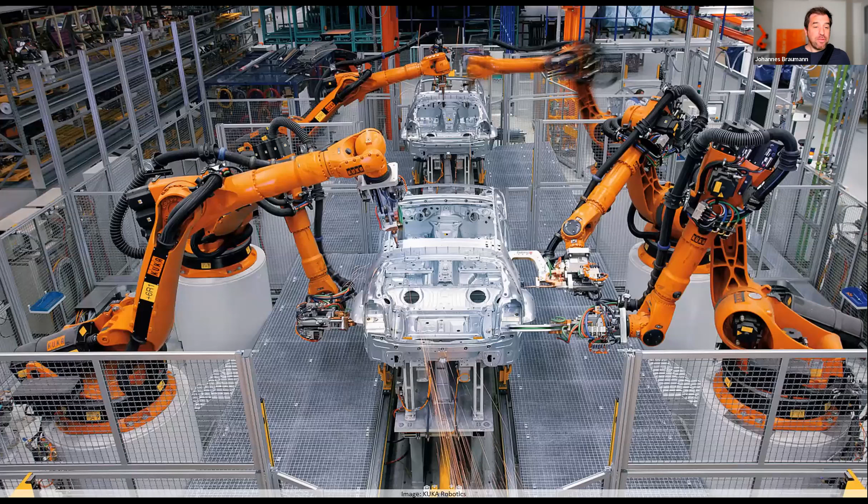First, it's important to look a bit at the terms. The title of my talk refers to large-scale robotics. We could have also called it industrial robotics, because these are the machines, the robotic arms, that we primarily work with. We chose large scale because the scope of our work isn't really limited to typical industrial processes.

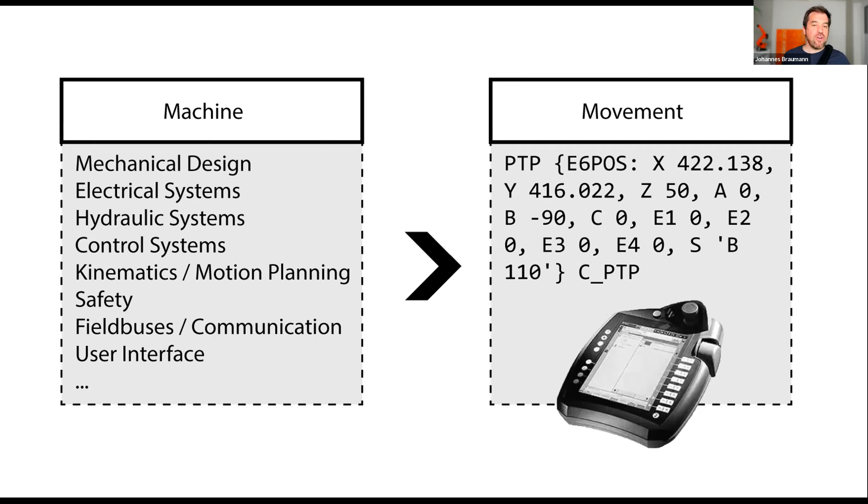We like using those robotic arms because they are such a stable motion platform. They greatly reduce the complexities of building a custom machine, and it still comes down to programming just the movement. Just movement is still a tricky term, because there are quite a few complexities in it, but of course this is much easier than having to build something with mechanical, electrical, maybe hydraulic systems, communication systems, and so on.

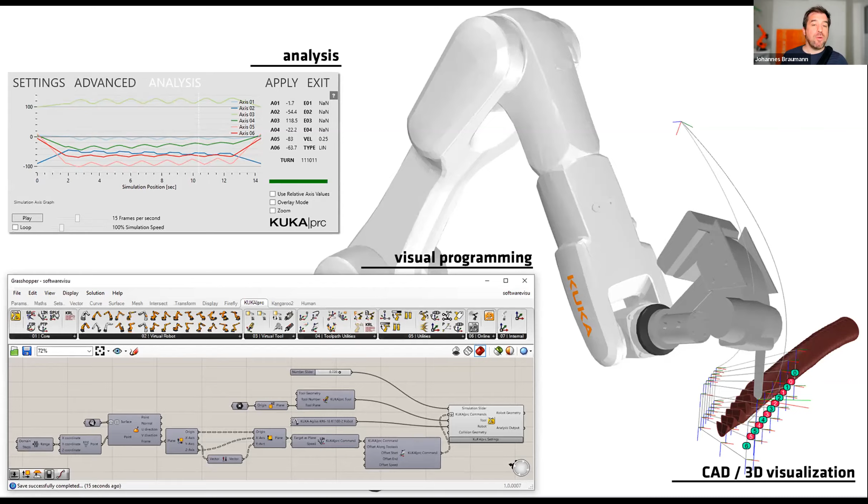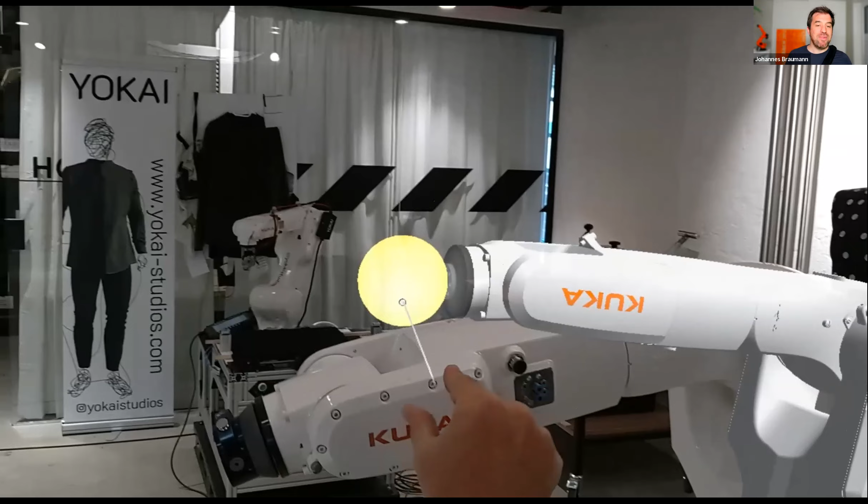But an interface can also be an everyday item, like for example here a mobile phone controlling these puppetry robots in real time. And within the scope of this research, of course, also an augmented reality headset like Microsoft HoloLens.

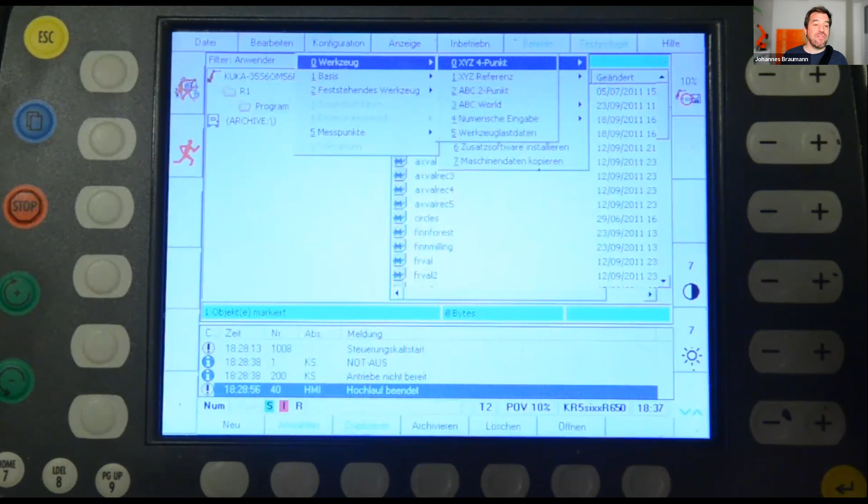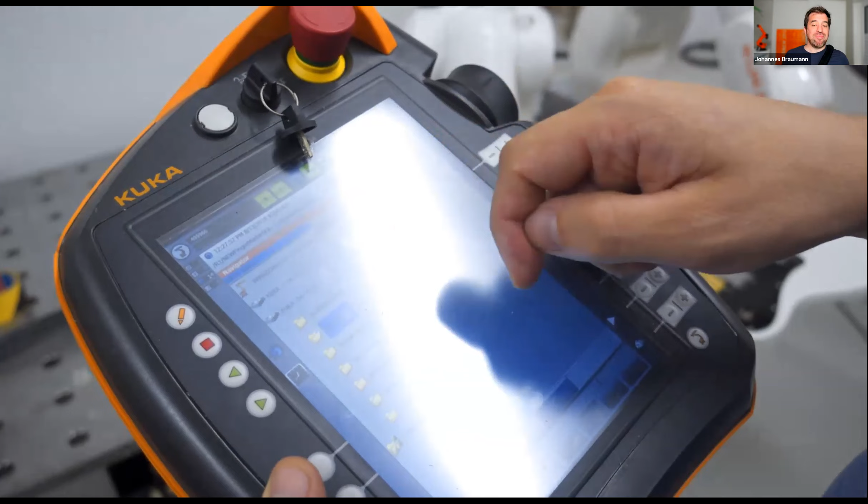You don't program in an IDE, but directly on the controller, the so-called teach pendant. Maybe that video is a bit drastic - this is how it looks for a current generation robot with a touchscreen interface. But the concept is identical: you move the robot somewhere, save the position, and repeat the process until the program is complete.

The nice thing about this is that because you program on the object, you don't have to worry about matching digital and physical data, since you're working in one single environment.

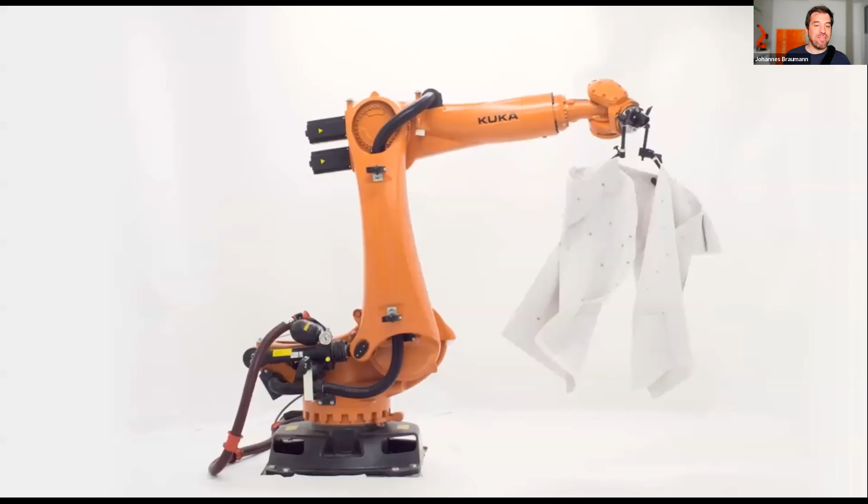That works well for processes like welding, one of the very original robot applications, but of course also for dusting off your McLaren if you want to - something we did for a pop-up store in Zurich at some point. But it's less useful when you do something with thousands of positions.

What you're seeing now doesn't look like thousands of positions, but actually this is a stop motion sequence where the robot controls two cameras, moves a small increment, takes a photo, and then repeats that. This was done to create an 8K 3D animation for the deep space environment at the Ars Electronica.

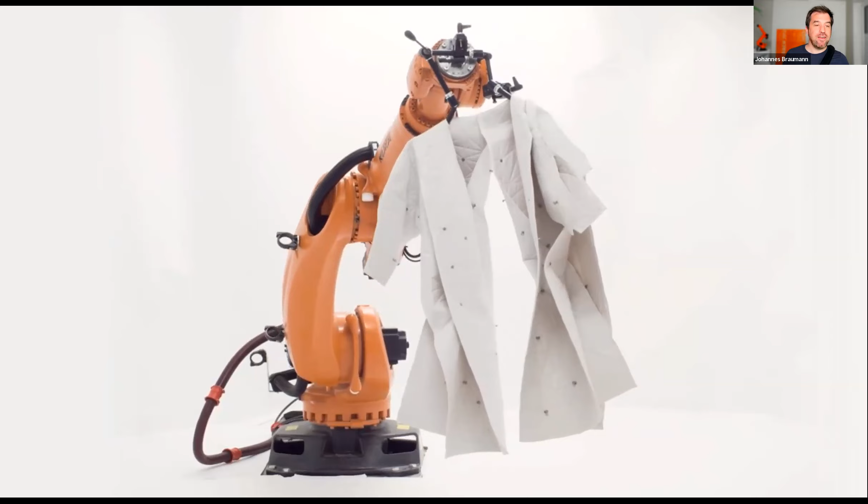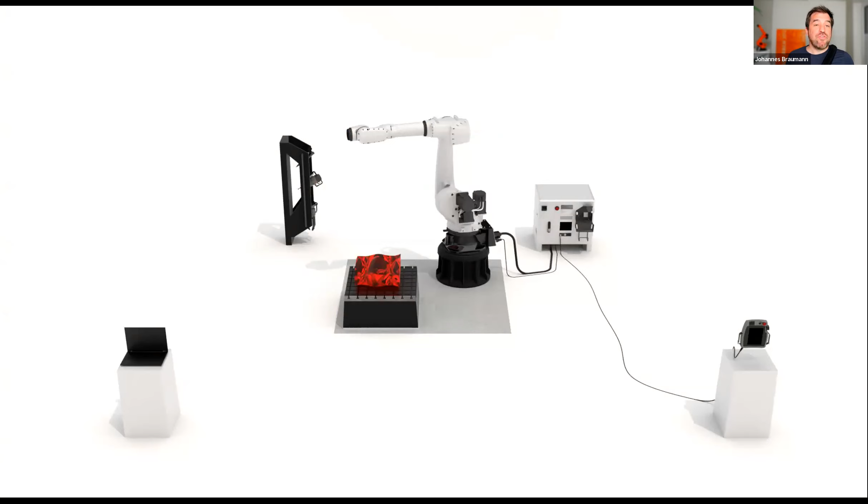You need to imagine a 16 by 9 meter robot reaching into the audience now, which of course we can't repeat over Zoom. That also shows nicely how an industrial robot is never just the arm, but is always part of a larger system with the controller, the tool, the teach pendant, and so on.

Obviously real-time control is important for the interactive processes we want to achieve through augmented reality, but implementing that can be trickier than expected. One of the reasons for that is motion blending.

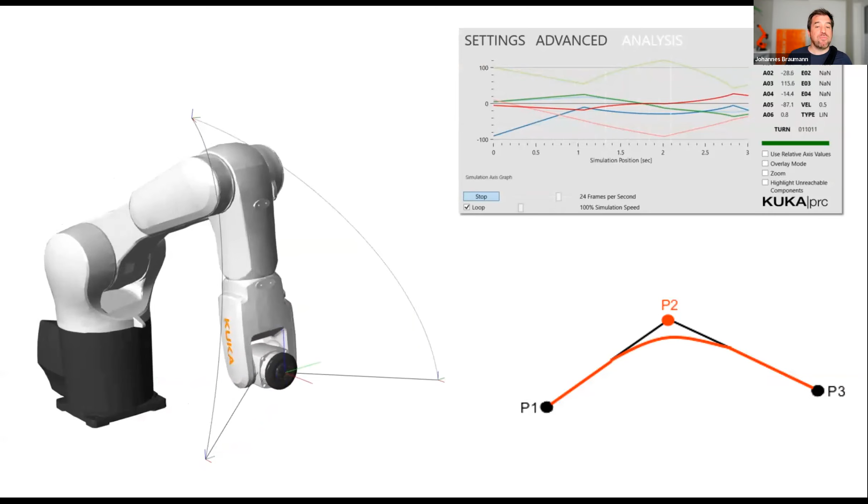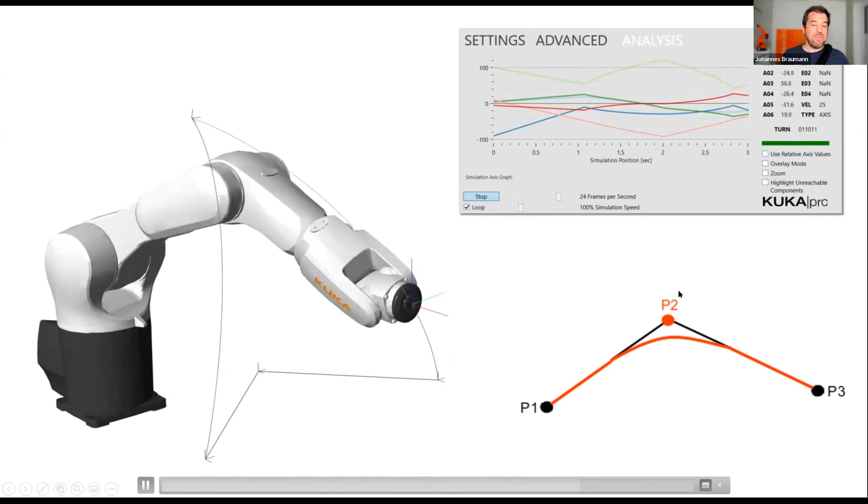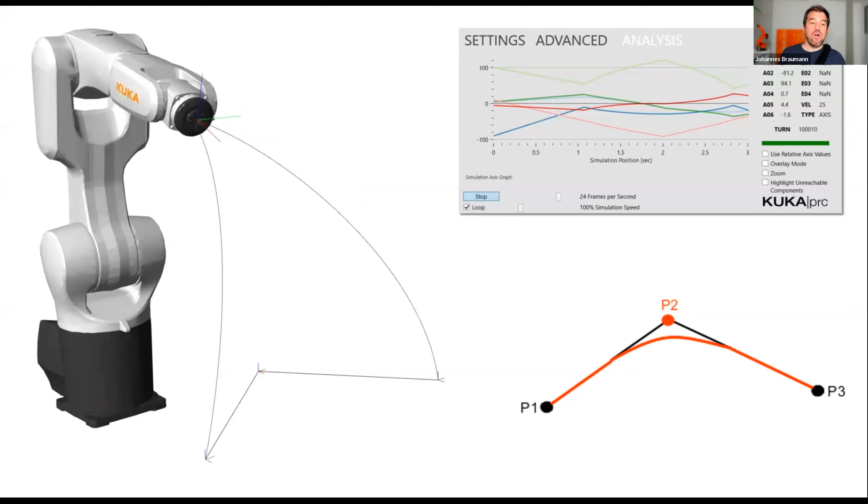If you look at the simulation, the robot moves through that sharp, nearly 90-degree corner at a constant speed. It doesn't slow down. In the real world, that would necessitate basically infinite acceleration to achieve. So what the physical robot can do is either stop at a sharp corner, or if it knows the next position, it can try to blend the movement slightly. That increases the response time of a real-time system, because the robot always has to have the following positions buffered in order to achieve a smooth movement.

Another challenge happens when we want to control the time. With the robot, we can only control the speed and the target position, but we cannot by default set the time when the robot should be at a given position. You might say, well, if you know the speed and where it's going, you can calculate the time. That would be nice, but unfortunately those acceleration and braking curves of the robot are not known, so you can't really easily predict that just by dividing.

A system that can do that is the so-called real-time sensor interface, RSI. That was initially made for sending the robot tiny offset positions every 4 milliseconds, for example, to achieve a constant pressure for a polishing process. You have a force torque sensor that gets a certain value, and then the tool moves a little bit in order to keep that constant.

Of course, instead of making tiny movements, you can also do large movements. With that system, you can basically create time-accurate processes, because for every 4 milliseconds, you define where the robot should be. And that data could be coming from motion capture, for example.

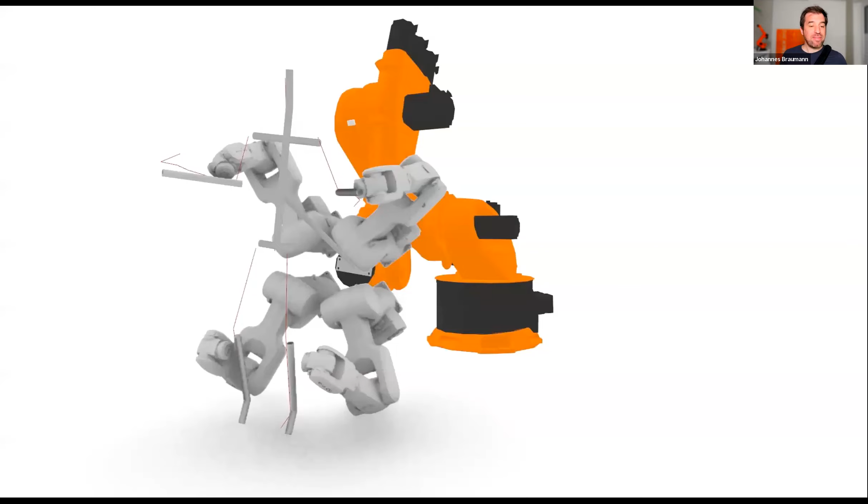Here, together with the Future Lab, we captured the movement of the dancer Silke Grabinger. Then in Grasshopper, we interpolated it to 250 Hertz and mapped it to a 5-robot system that duplicated the movement with the exact timing. We have one big robot doing the large movements, and then 4 small robots, each responsible for a single joint.

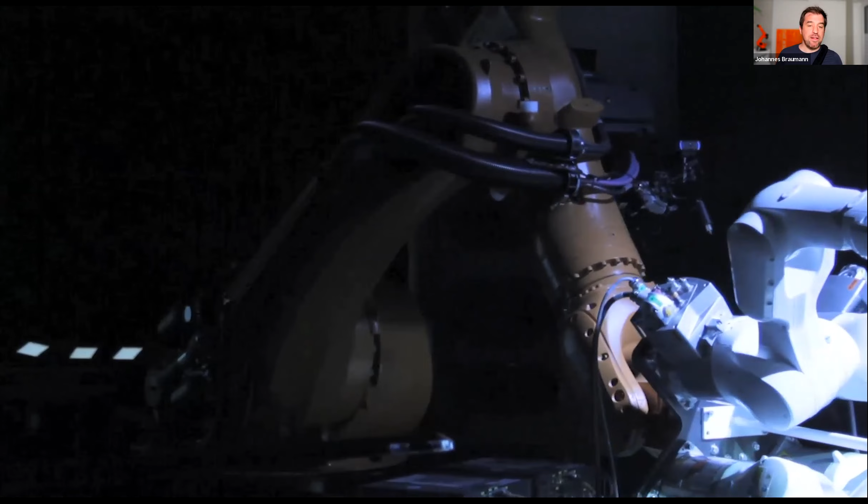Of course, our Windows PC was not able to stream the data deterministically, so we used an industrial PLC to send the data over an Ethercat field bus to the 5 robots, so that this would really work in a very reliable and safe fashion. You see the performer and the robots are quite close to each other, which is of course tricky for everything that is basically real time.

The third option is that you can always fake it by reversing the constraints. For example, here we don't influence the movement, but instead just send the vector of a toolpath to an external live visualization system, in that case based on VVVV, because we have the option to send any kind of arbitrary data between our control system, our laptop, and the robot. So here the complexity of the robot movement is omitted, because the robot just sends where it is to the visualization system, which is then much easier to control than the physical aspect of the robot moving around.

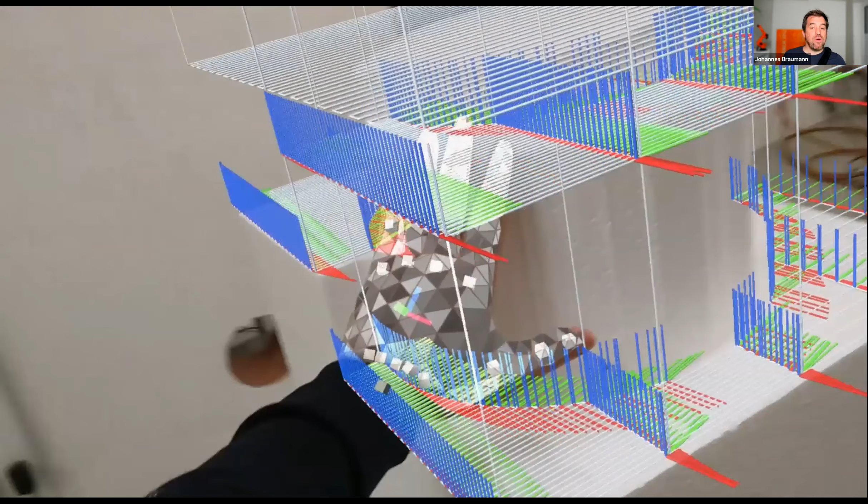So to come back to augmented reality, for us, we currently see the largest potential in the areas of supervision and interaction. Where is the value in seeing where the robot will move, superimposed over the actual object?

A part of every robot process is the matching of the virtual and physical environment, because only then can a simulation be accurate. At the very least, the robot has to know where the origin of the 3D or CAD system is located in its physical workspace. And while the robot itself doesn't care about the geometry of an attached tool, whether it's a sander, a drilling tool, a paintbrush, or something entirely different, it has to know a reference point on the tool.

And currently, that creates a large potential for errors, because we usually do this by hand. For example, we move the robot to 3 positions on an object to define the position of the coordinate system, or we approach a given point from 4 different directions to calculate where this reference point is in relation to the flange of the robot. So we think AR can really help make sure that the virtual and physical spaces correctly overlap.

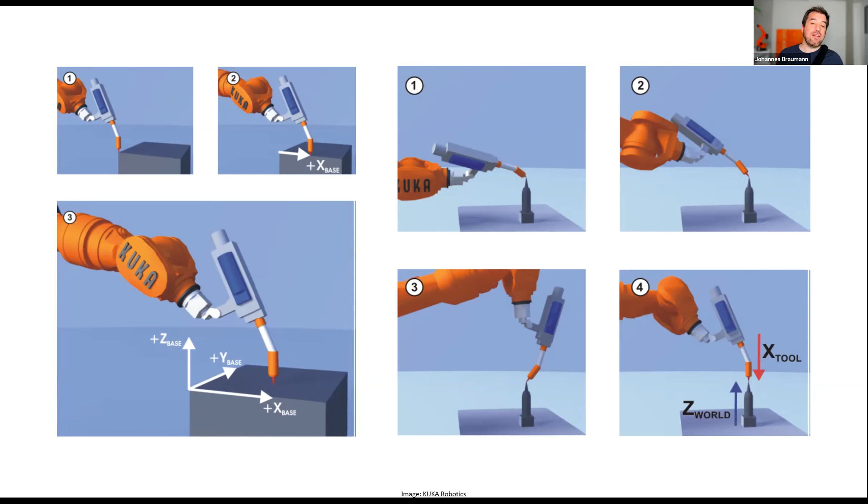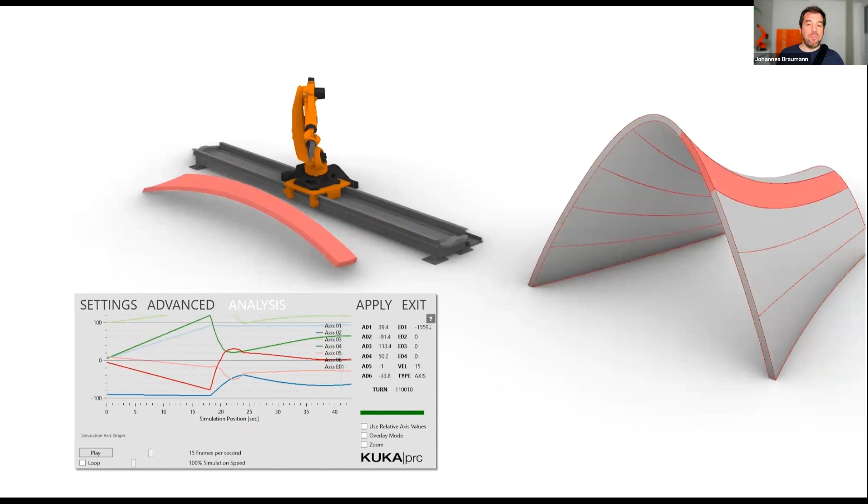That brings us to interaction. My default tool to use is Grasshopper, a very geometry-focused visual programming environment where your code forms an acyclic directed graph. This is best for production processes and mass customization, where you go from design to fabrication. You can repeat that process a few times, but fundamentally it's not cyclical, so this is less ideal for interactive processes.

Also, Rhino and Grasshopper's systems don't basically run on headsets, Windows-based ARM devices, or whatever. Unity, on the other hand, works very well with augmented reality headsets. We also like the capabilities of visual scripting to allow us to visually define state machines for user interaction in a very accessible way. However, the geometry library is much more limited if you want to do complex toolpath calculations, and a headset's performance would be too low to do these complex calculations.

For us, an enabling factor now is Rhino Compute. This is a system provided by the developers of Rhino that can run complex Grasshopper calculations easily on an external server. So we first set up a server that runs Rhino Compute to offload the complex calculations from the headset, with a nice and easy to use REST interface.

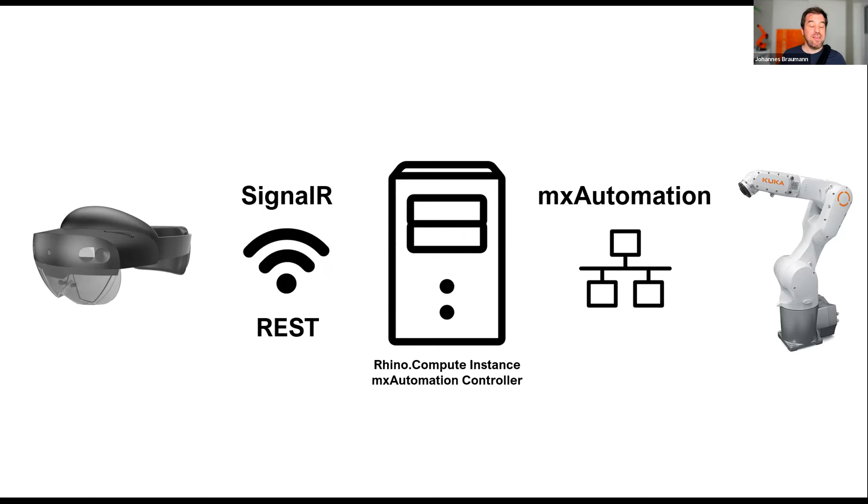But then during testing, we realized that the headset's Wi-Fi communication was also too unreliable for an industrial machine, leading to timeout errors. So we were already using a hard real-time interface. To solve that, we created a custom interface that basically uses very soft real-time calculation via the web technology SignalR with the headsets, and then on the other side communicates with the robot through a stable Ethernet interface.

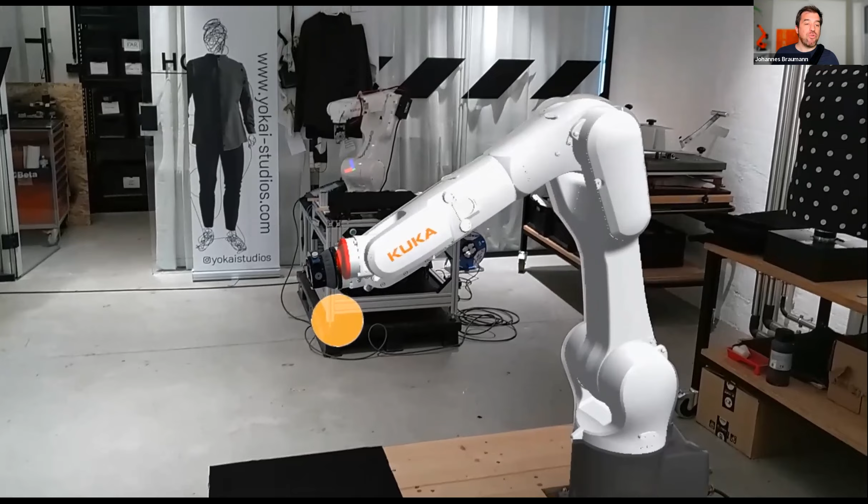So here's a quick try of that in augmented reality, where we virtually programmed positions and then had the physical robot repeat them, just like the teaching by demonstration that I mentioned before, but in this case done in a combined kind of digital and physical environment.

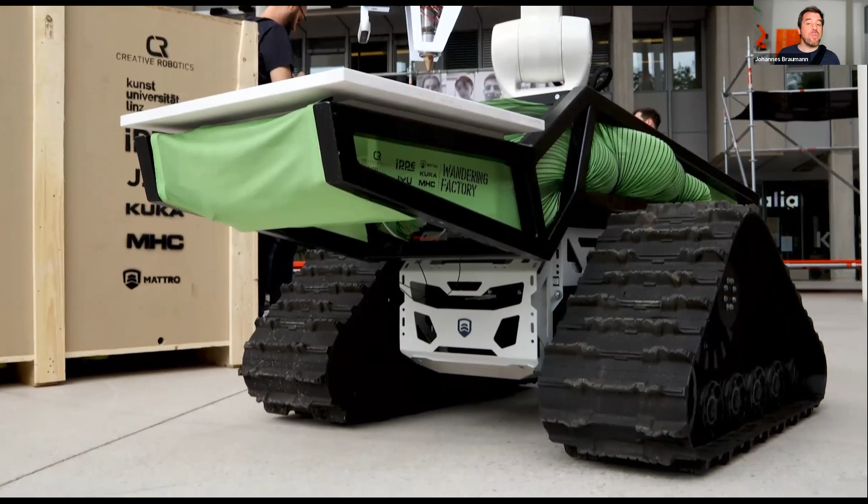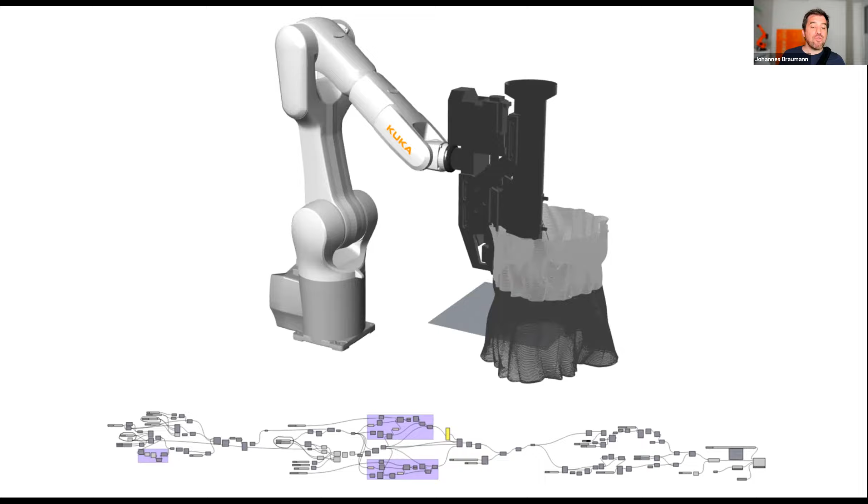We used that software architecture also for another project where augmented reality was only used for visualization. This is the Wandering Factory, a mobile robotic fabrication platform. Here you can see in Unity how the platform perceives its environment with a 3D camera and then prints individualized objects that fit exactly onto the scene. The individualized path planning is again done in Grasshopper, but is then exposed to the user through our Unity visual scripting based software architecture.

So we're still at the beginning of this journey, as I mentioned before, but we really see a large potential in augmented reality for large-scale robotics. And honestly, we're having a lot of fun just playing around with these exciting technologies. So thank you very much on behalf of the entire team. I'm happy to answer any questions you might have. And I'm also already looking forward to the other presentations to see what is happening in the world of augmented reality. So thank you very much.

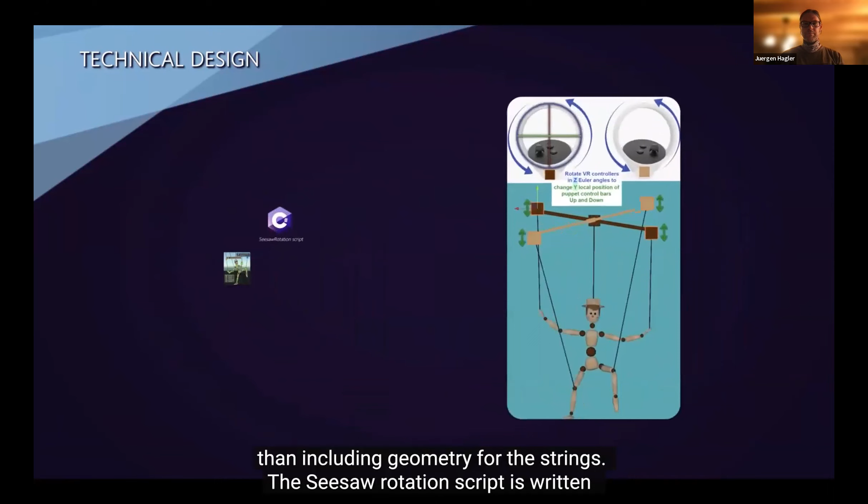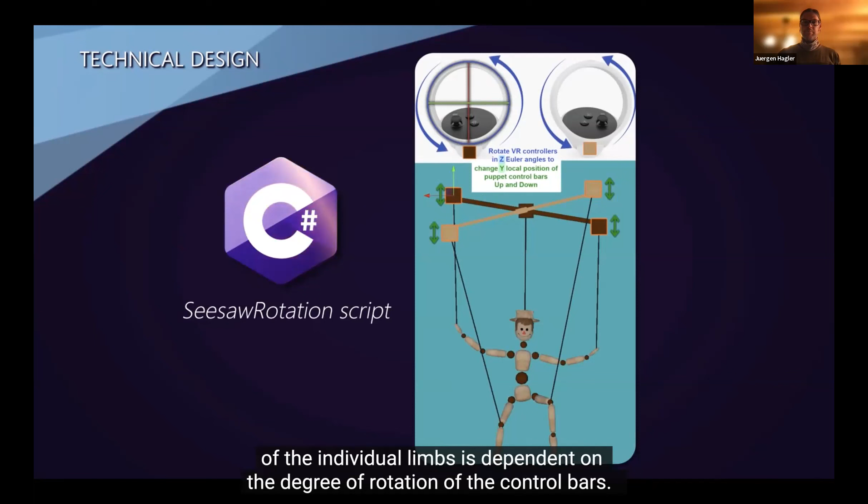The seesaw rotation script is written to imitate the body movement of a real-world marionette. The current position on the y-axis of individual limbs depends on the degree of rotation of the control bars. By grabbing the wooden control bars and changing the rotation on the z-axis, individual arms and legs can be lifted or lowered. The project is implemented in Unity and built for the Oculus Quest 1 and 2.

To provide simple interactions such as locomotion and grabbing the wooden control bars, the XR Interaction Toolkit is used. After correctly setting up the Guardian system, which defines the boundaries of the play area for the Oculus headset, the prototype can be used at any location where it is possible to fully stretch both arms.

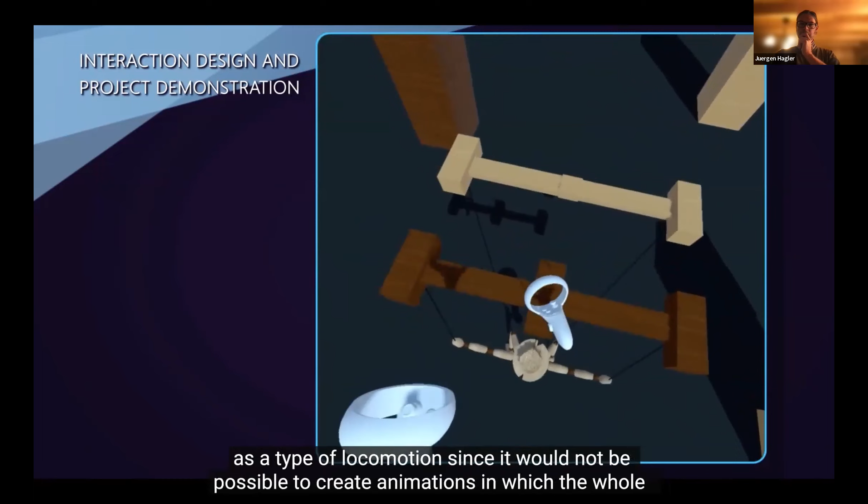In this project, the user can navigate to the marionette in the scene using the joystick of the left VR controller to interact with the puppet in play mode. Continuous movement was chosen as the type of locomotion, since it would not be possible to create animations in which the whole puppet moves by teleporting from one position to another.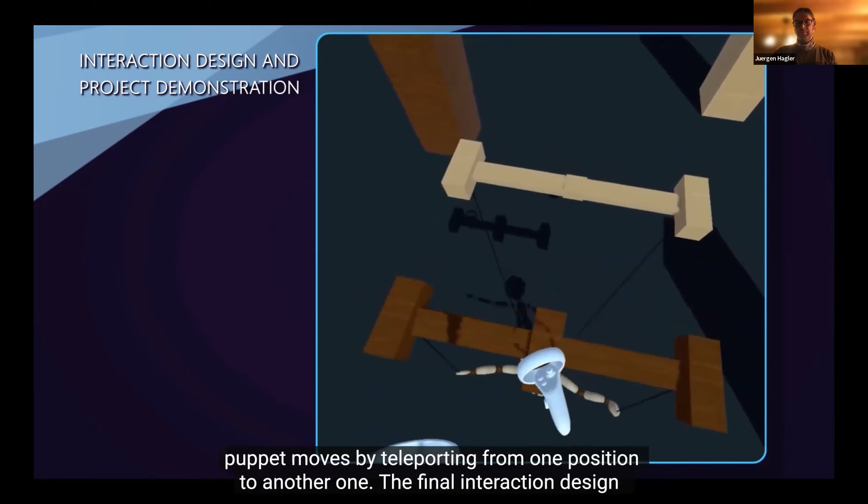The final interaction design of the puppet is strongly based on how controlling marionettes works in the real world. To grab the wooden control bars of the marionette, the user can reach out for them and press the grip button on the controllers to hold them.

With this design decision, the user can decide with which hand the controls for the legs or hands should be grabbed. With a combination of changing the height and orientation of the leg controller, a simple walk cycle can be created.

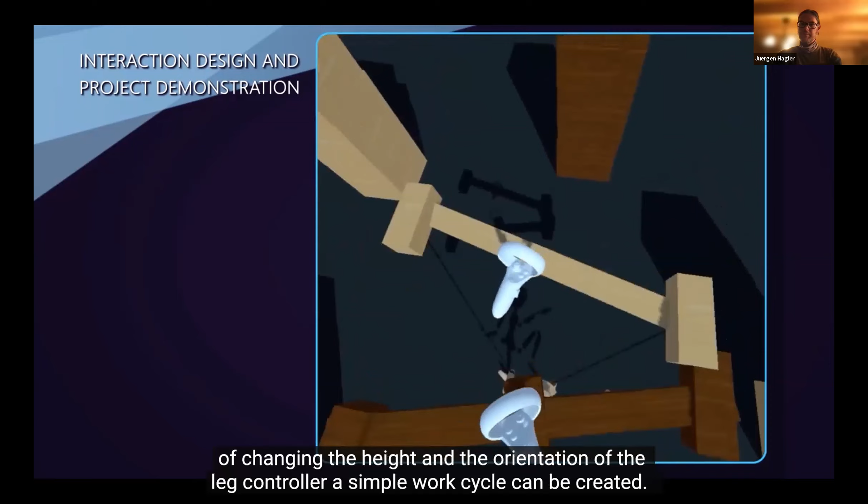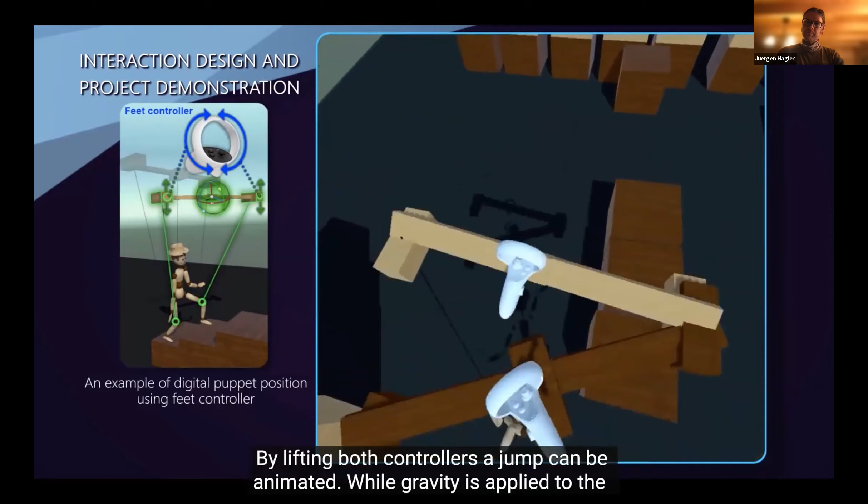By lifting or lowering the bar for the arms, the general posture of the puppet can be influenced, making it possible to animate the puppet in a standing, sitting, or kneeling position. By lifting both controllers, a jump can be animated.

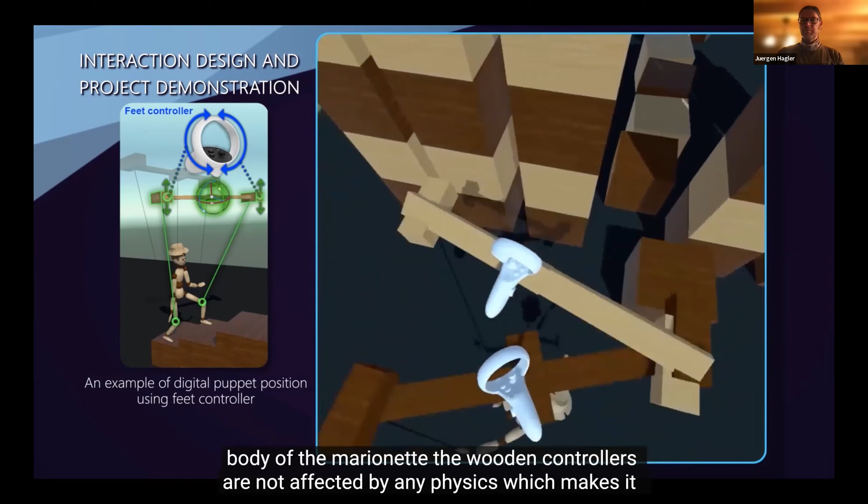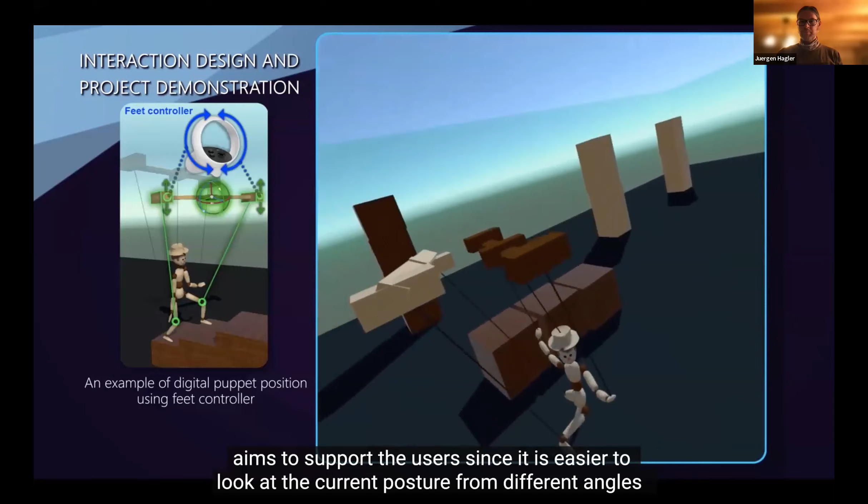While gravity is applied to the body of the marionette, the wooden controllers are not affected by any physics, making it possible to easily release them and pick them up again from a different perspective. This decision aims to support users since it is easier to look at the current posture from different angles, and it prevents tangled strings that would happen with a real puppet in the real world.

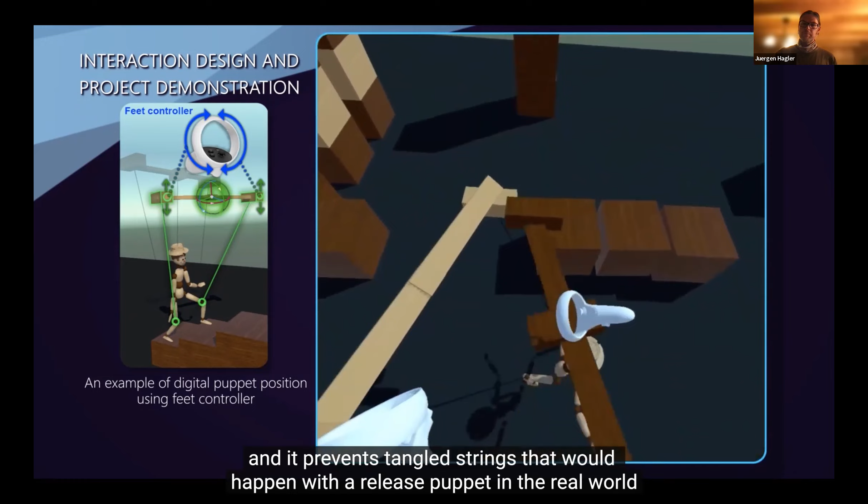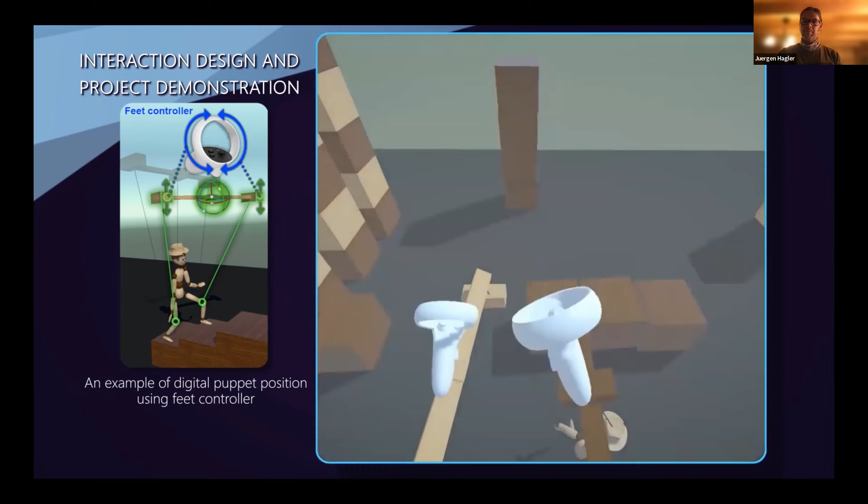In the earliest stage of designing, the puppet was rigged in 3ds Max. However, the rig was not reliable enough and the movement of the puppet did not feel natural with the bone systems in Unity. Therefore, the whole rig was built with physics components in Unity, which had a more satisfactory outcome.

In other early approaches, interaction for controlling the puppet was designed in a more abstract way, by controlling the left arm and leg with the left controller and the right arm and leg with the right controller. By mapping the activation of controllers to the primary and secondary buttons of the controller, the user was not only able to control each limb individually, but also could decide when to release it again.

However, pressing 4 buttons individually was not intuitive. Therefore, the implementation focus was changed to analog marionette controllers.

Another design idea was to let the head of the puppet follow the position and rotation of the headset. This worked very well, but led to the problem that the user could not fully release the whole puppet and control it from a different perspective. For this reason, the head was attached to the arm controller in the current implementation.

During the prototyping of the digital marionette in VR, we found a limitation of our prototype, which becomes visible when the distance between the grab control bars becomes too high by fully stretching both arms. Since users can move their hands without limits and do not feel the stretching of strings like for a real-world marionette, extending these limits in the current implementation leads to undesired behavior.

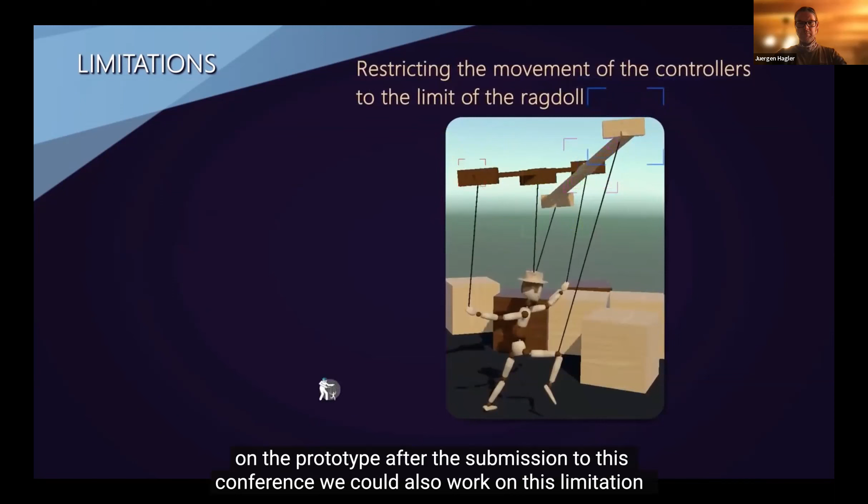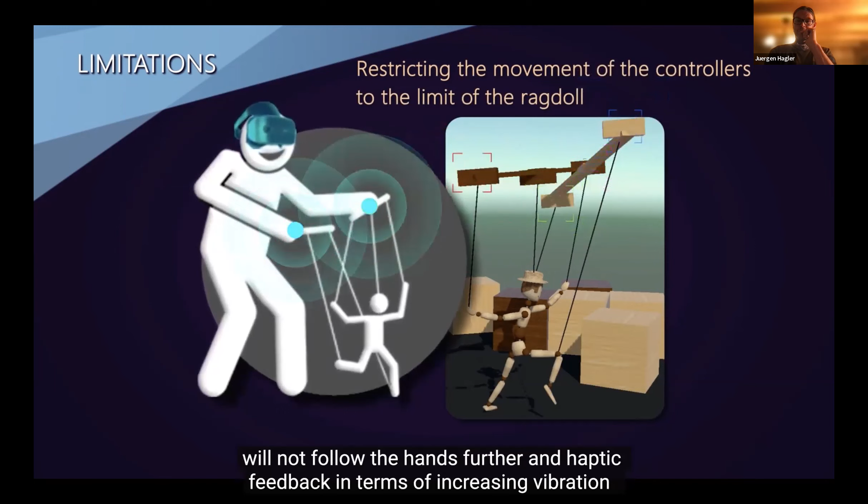Since we continued working on the prototype after submission to this conference, we could also work on this limitation by restricting the movement of the controllers to the limit of the possible movement of the ragdoll. If the user wants to extend the wooden control bars further than the limit, the control bars will not follow the hands further, and haptic feedback in terms of increasing vibration of the controllers will inform the user that the possible limit is reached.

At the moment, the control rig only works for humanoid puppets, but it can be easily extended for non-humanoid puppets. Future research will lead to 2 directions.

The first direction will focus on building a low-budget animation authoring system in VR for people who are still new to animating characters and cannot afford expensive software and hardware.

We plan to make a training scene to guide beginners on how to animate a simple walk or run cycle in VR and record their work. Then they can play the recording keyframes and walk around the virtual training room to see the outcome from different angles. Face puppeteering can be added to the current setup by intuitively driving facial expressions with buttons on VR controllers.

In the second direction, we would like to use the digital marionette in a future VR game. We are currently working on using the digital marionette in a VR game and want to investigate how the puppet's physics affects the game experience.

A big inspiration for this research direction is games like QWOP, Octodad, or Goat Simulator that have challenging physically based character controls. We want to measure to what extent these challenging physics for controlling a character in a VR game contribute to the game experience.

Overall, the lessons that were learned during this work may benefit animators, game designers, and researchers who also intend to bring analog puppetry into the immersive virtual environment. Thank you for your time, and we would be happy to answer some questions.

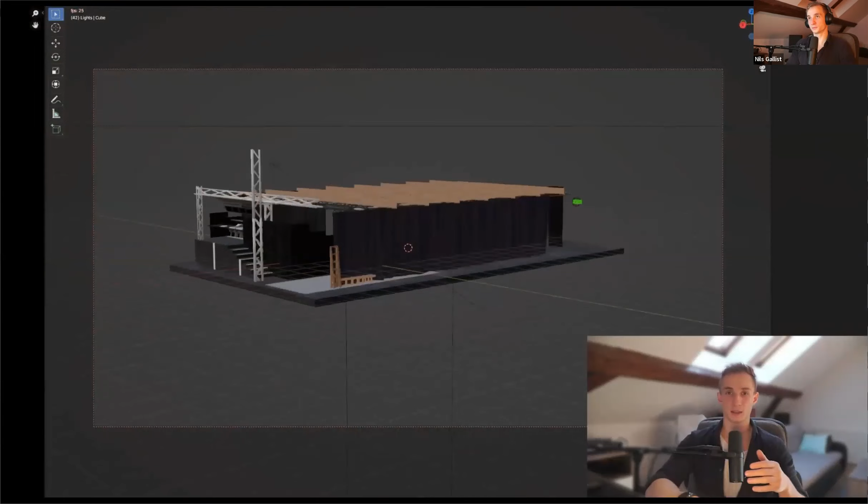To answer our question, we teamed up with the local city theater, the Landestheater Linz, to identify and compare the strong suits and weak spots of using a social virtual environment as compared to video-based meetings. The theater had planned to provide students with a more in-depth look at one of its stages and how a theater play comes together, but COVID restrictions made physical presence of these students impossible.

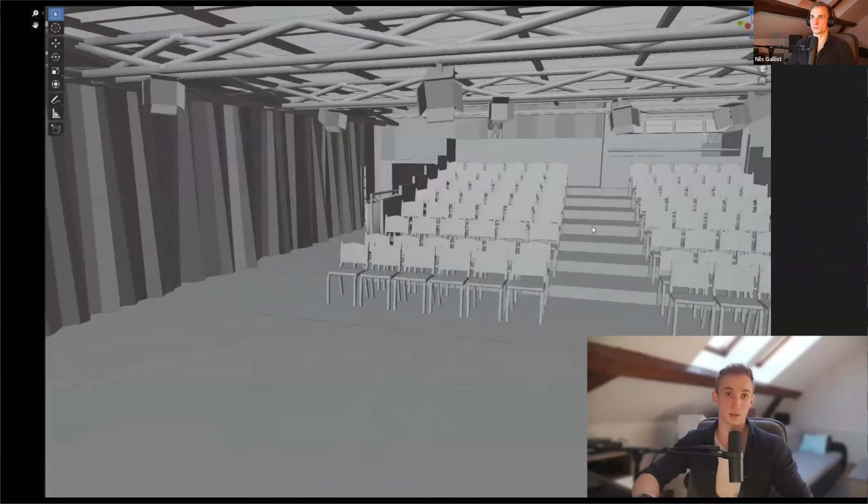So we created a virtual environment, a digital rebuild of the theater stage. Based on architectural plans and pictures, we constructed the stage in a resolution that allowed hassle-free setup in our tool of choice. In the end, the students could explore the stage in a social virtual environment that you see here. This is Mozilla Hubs.

But why use Mozilla Hubs? Well, the system requirements called for an application that does not need to be installed, is accessible from almost any device, and free of charge, to have the lowest barrier of entry possible. Additionally, this application features a variety of communication possibilities via speech, text, video, as well as expressing through gestures, and can be entered by almost any device, be it smartphone, notebook, PC, or virtual reality headset. It is also possible to place 2D images or videos and 3D items into the space. The latter feature was used extensively over the course of this research.

Because the task was as follows: the students were separated into 3 groups of various sizes. The separation was purely so that people overseeing this project could focus on similar group sizes; no additional parameter was used. These 3 groups were read a piece of Johann von Goethe's Faust, without them knowing it was text from a specific piece of literature. They were then asked to rebuild the environment purely based on what they just heard.

However, not all participants were in Mozilla Hubs. Some were joining a Microsoft Teams call and were watching the shared screen from one of the guides overseeing this project.

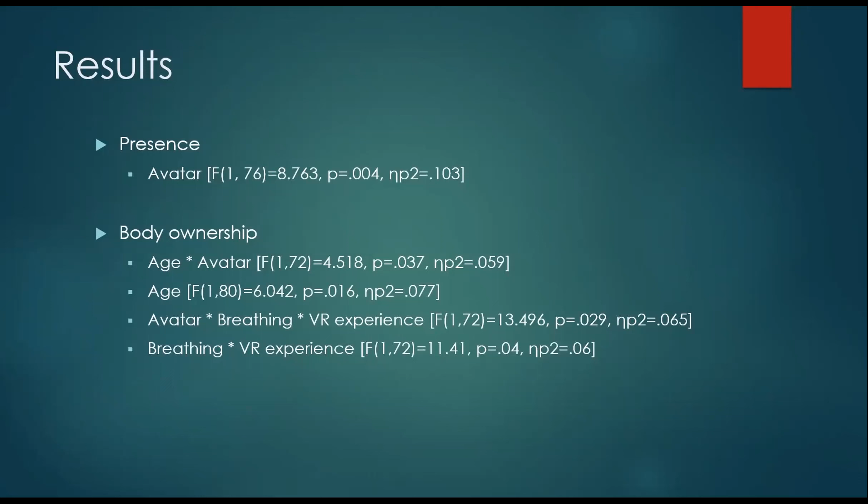From these results, we move to discussion regarding these two variables. First, on presence, we found significances indicating a higher sense of presence with a less realistic appearance. We believe this does not align with previous results, since prior VR studies indicate that higher realistic appearance actually leads to a higher sense of presence. In our case, we think the reason is that we are lacking the sense of agency, because there is less motor control regarding the self-avatar.

Basically, participants were just sitting on the chair doing a minimal amount of movement, which could be the reason for the less realistic sense of presence. As for body ownership, we found significances regarding the breathing animation, prior experience, and age. Younger participants rated higher body ownership with the mannequin avatar than older participants.